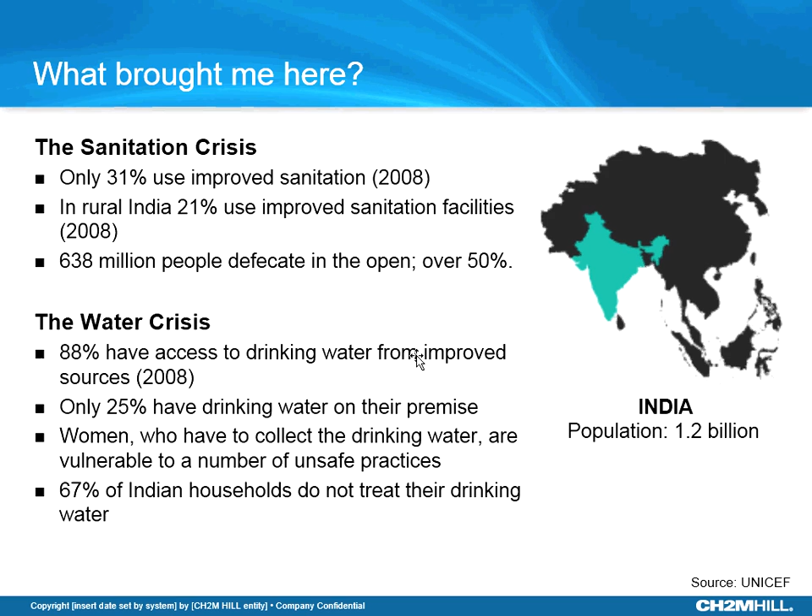And I did my graduate degree in environmental engineering, and I focused on water and wastewater treatment. During grad school, what brought me to the Bay Area is an internship at the Oceanside Wastewater Treatment Plant, which is by Lake Merced, and that was my first time being at a treatment plant. That was pretty much where reality sank in of what I was into.

I got all of my groundwork and my foundation being there for 6 months, and my professional network kind of grew around the Bay Area, and when I graduated, I got hired into CH2M Hill, and I pretty much do what I was doing before, which is wastewater treatment.

It's a little hard to understand what wastewater treatment or process engineers do without really knowing that side of the world. So I just want to get a quick show of hands of who here has ever been to a treatment plant or even knows what happens once you flush at your house. Yeah. Well, that's a good show of hands. It could be worse.

So yeah, I just wanted to give you the quickest tour that I can. I will do that just so that it puts it in context, and then I can talk a little bit about my project. So I will pick up what's the start of the pipe for me. Let's see. So that's pretty much at your businesses and in your homes. What's flushed is what's going to the treatment plant. And that we refer to as collection systems.

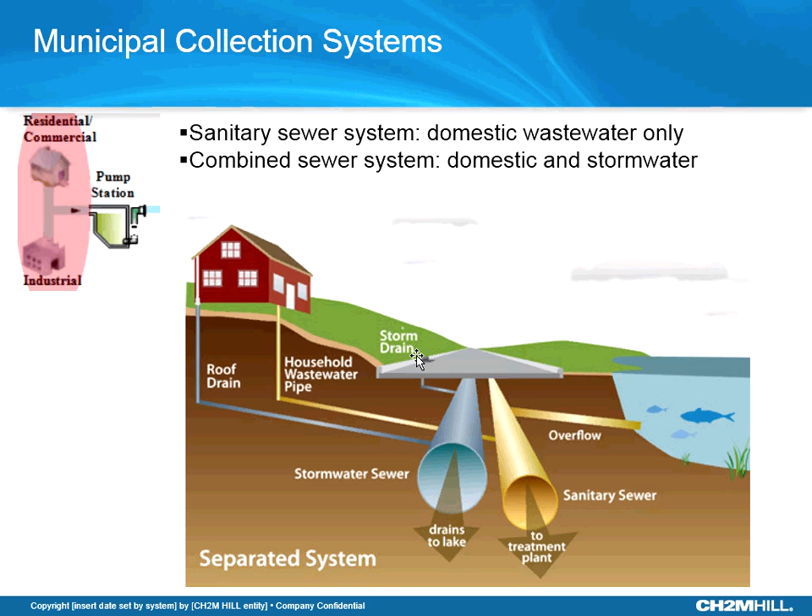So San Francisco has a west and an east system. The west side is what goes to the Oceanside Wastewater Treatment Plant by Lake Merced. So over there, if in those systems there's an overflow, it goes into the ocean. But it's not a direct overflow. It is stored. There's large underground storage cisterns that store the water, and then they go through at least a preliminary, safe level treatment before it's dumped into the ocean. And on the east side, it goes to the Southeast Treatment Plant. Almost 80% of San Francisco goes to the Southeast Treatment Plant. And so the discharge from that end is into the bay.

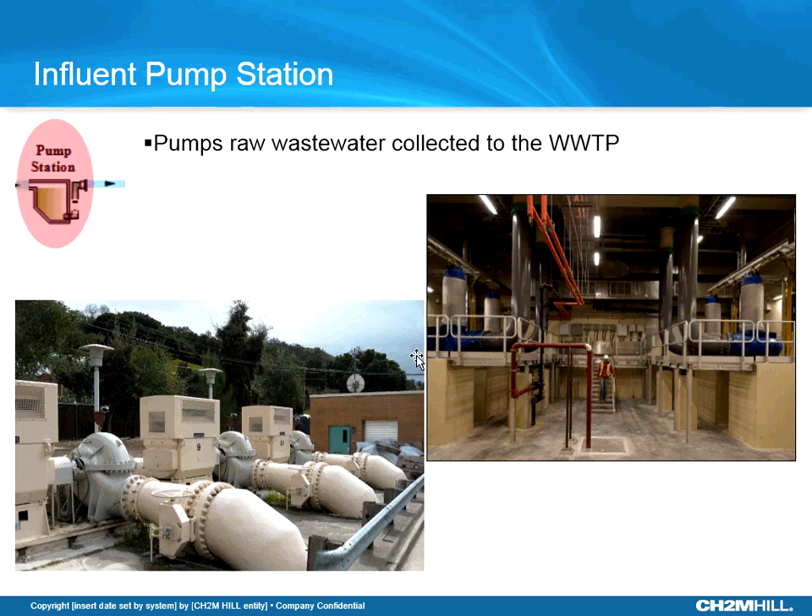And so once it's in the systems, you have these spread throughout the city. You have pump stations which pump it depending on where the system is, east side, west side. It goes into the treatment plant. And the first step is screening, which is pretty much everything that's big enough to be caught will be caught first before it goes into the more sensitive processes.

And it's funny the things that you will see here. There's been dead seals to beds, it's the strangest things that you will hear about. And those are the reasons why, when people say don't flush so-and-so things down, there's a real reason for it. Because this is where we will see it.

So that's the screening step, and after that it goes into a primary sedimentation. I'm sure you guys know what sedimentation is. It's a simple process where all of the solids settle down and the liquid goes from the top. So this is what that looks like.

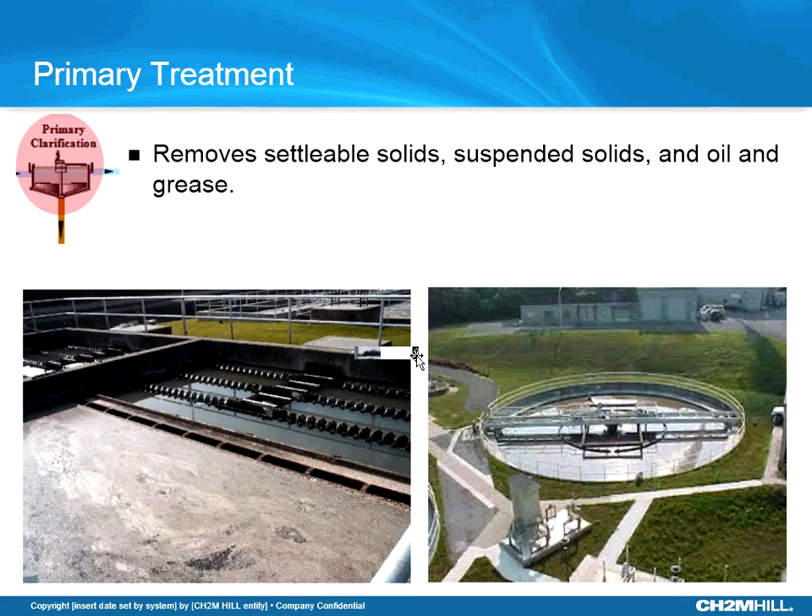And then the liquid moves through what is the heart of the process, which is a biological process. So this is where we have microorganisms, who we simply call bugs, which treat the water. It's held there for a sufficient amount of time based on design, and it pretty much cleans the water up in this process. And this is the most sensitive part of the treatment plant.

And so the other story of not flushing your pharmaceuticals, mercury and those very minute toxic chemicals down your toilet is because of this, because the bugs are the most sensitive and they're toxic to them. And once this is down, then the treatment process is down and really hard to start up again. And moving from there, it goes into a secondary clarification. There's again a separation, and then you actually have truly secondary treated water, which is safe for disposal.

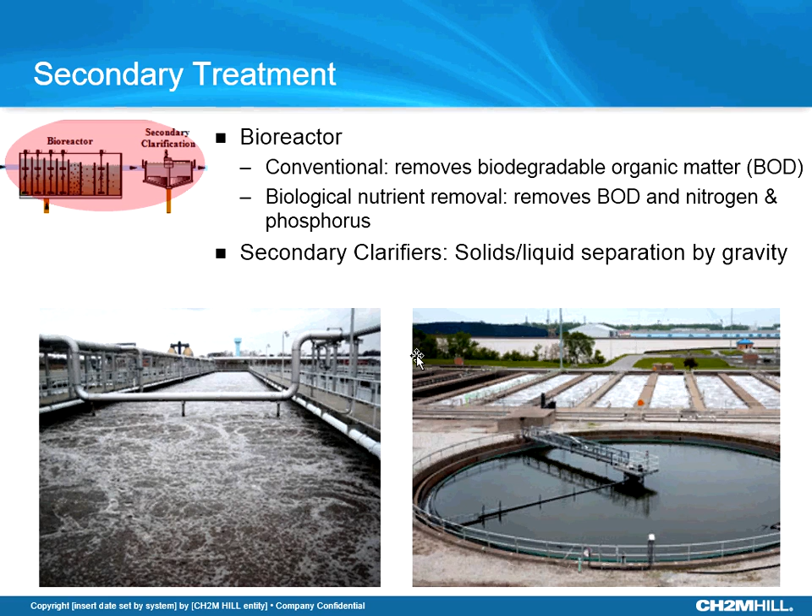Wastewater treatment has progressed a lot since the Clean Water Act kicked in. In the early 70s, people were just doing primary treatment, and then they mandated secondary treatment, which is what's referred to as safe treatment as of now. But it has progressed further because of water shortage, with recycled water being a hot topic. So wastewater treatment plants are taking that secondary effluent and putting it through advanced treatment, which is pretty much disinfection.

When you disinfect it, it becomes more valuable than just discharging it, where you can use it for reclaimed uses.

Every city manages it differently. A lot of it is public outreach. A big component of things that are beyond our control, like the boundary I talk about, is public outreach. There are voluntary programs, like a pharmaceuticals program citywide, which puts in place collection facilities or processes so it's easy for the user to dispose of their pharmaceuticals and other things. So the city puts things in place so that it's easy enough for the public, even though it's voluntary, to do their contribution to the treatment that they don't really see happen.

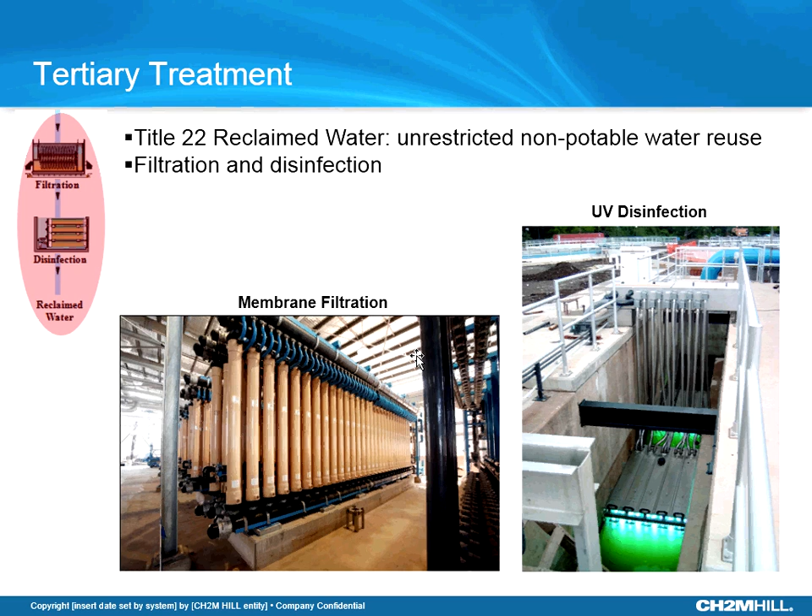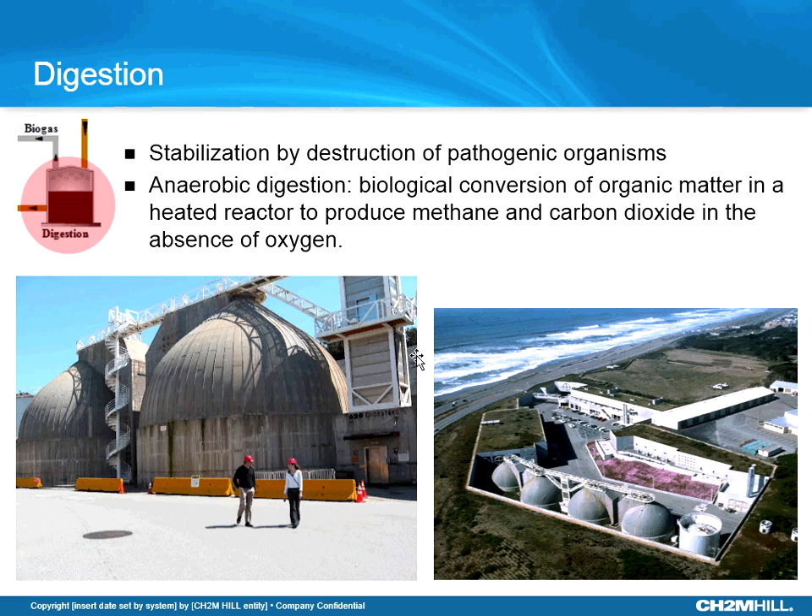The solids left from the entire treatment process, at the most basic level, get sent to a landfill once they're safe. But again, a hot topic is that even the solids can be reused, and there's a lot of potential there for energy. If you do what's called combined heat and power for digestion, you can actually recover and create heat and power from the solids.

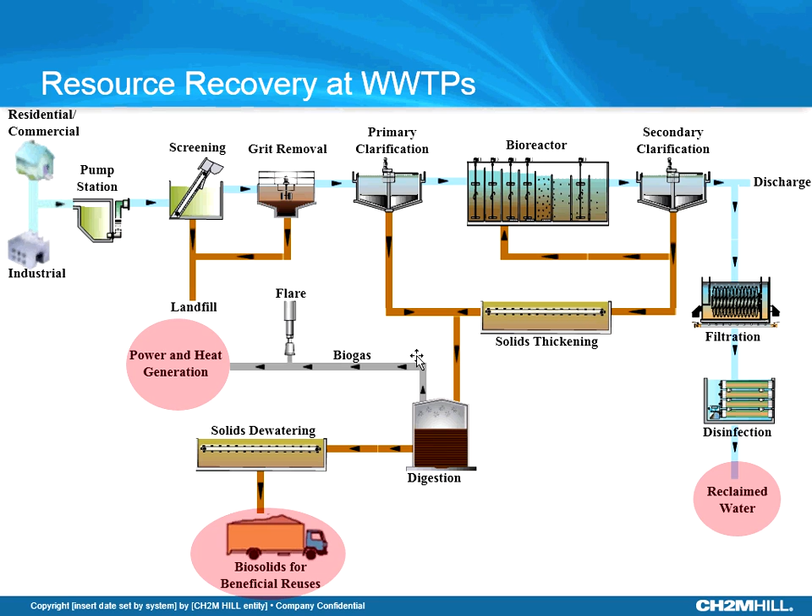These are the hot topics in wastewater right now that are trending—it's getting more advanced, where treatment plants aren't looked upon as just whatever people think about wastewater treatment, but are trending more towards becoming energy and resource centers. That's my spiel on the wastewater treatment plant, just so you'll know what goes on once you flush and it goes to the environment—that space in between.

Obviously engineering is on the top of my list. We want to promote that there are a lot of opportunities in these unconventional engineering fields too, like wastewater and water, which aren't necessarily always thought about for engineering, but there's a lot of opportunity there no matter which track you take—structural, mechanical, electrical. Even if you take any of those, you can be part of an industry like wastewater or other unconventional fields, which have these multidisciplinary engineering teams. That's what I wanted to focus on.

And then, in case you don't do engineering, which we hope you do, but still science-focused, there's a lot of other tracks and opportunities within the same industry. So specifically in water and wastewater, you can be a part of operations and maintenance. A lot of the big cities and plants have their own bio and chemistry departments. Environmental compliance, which is to do everything with the treatment plant complying to permits once it gets out. Because pretty much everything that we do is compliance driven. It is to save the waters as far as this one's concerned. So there's a lot of opportunities within just this one industry.

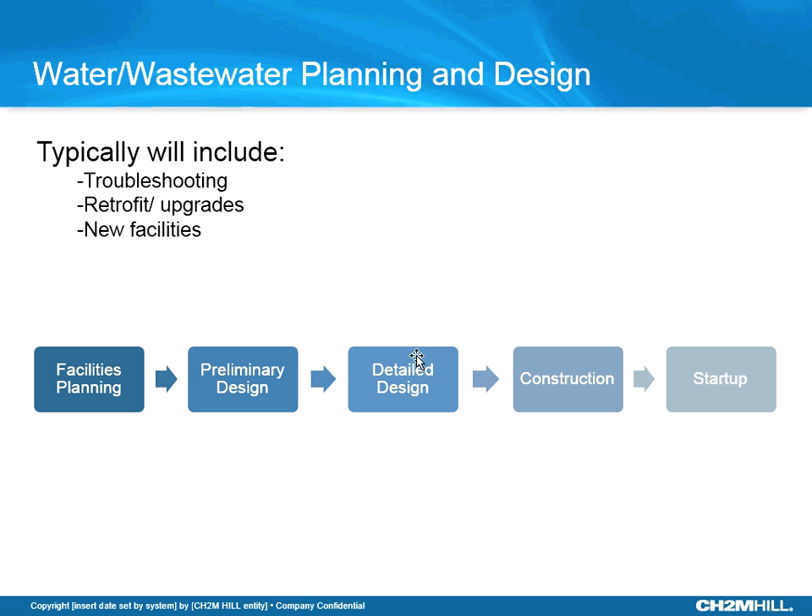And I just wanted to give you a few examples of cool Bay Area projects that I've been a part of.

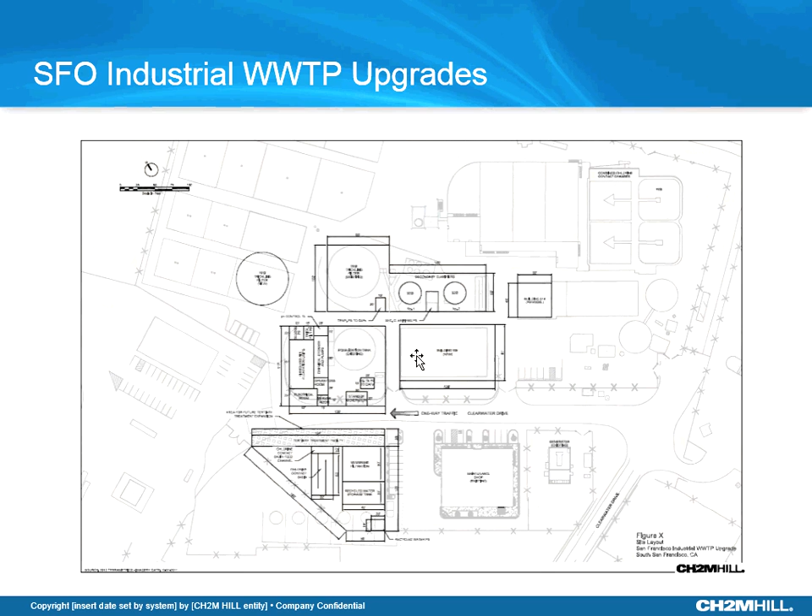Currently, my world is made up of these two. Palo Alto has a really big regional water quality control plant—Palo Alto's and all the other local regions' waste goes to that plant. They're one of only two wastewater treatment plants in the Bay Area that still incinerate, which is much older technology, so they want to upgrade to make better use of their energy and resources.

This is an example of brand new facilities, which are really good projects for a career, where you're part of it right from the beginning—picking treatment processes, putting it on the plot, everything. So that's super fun to do.

And this is our big one—Giuseppe and I are both on it, so he'll talk a little more about it too. This is the Southeast plant I was talking about in San Francisco, in the Bayview district. Their treatment plant, the solids side—everything solids related I mentioned—that plant was built in the early 50s, and that whole process hasn't been upgraded since then.

So it's definitely pushing the life of the facility, and they're planning all brand new biosolids treatment facilities. We just kicked that off last year, and we're planning—this is brand new stuff. We've just laid out the facilities, and we're looking at a whole bunch of alternatives for what's best for the plant and what's best for the city.

Once you've done that, this is a practice you do just to make sure whatever you've designed fits before you go any further. If it doesn't fit, you go back to the drawing board. So that's what we do with site layouts.

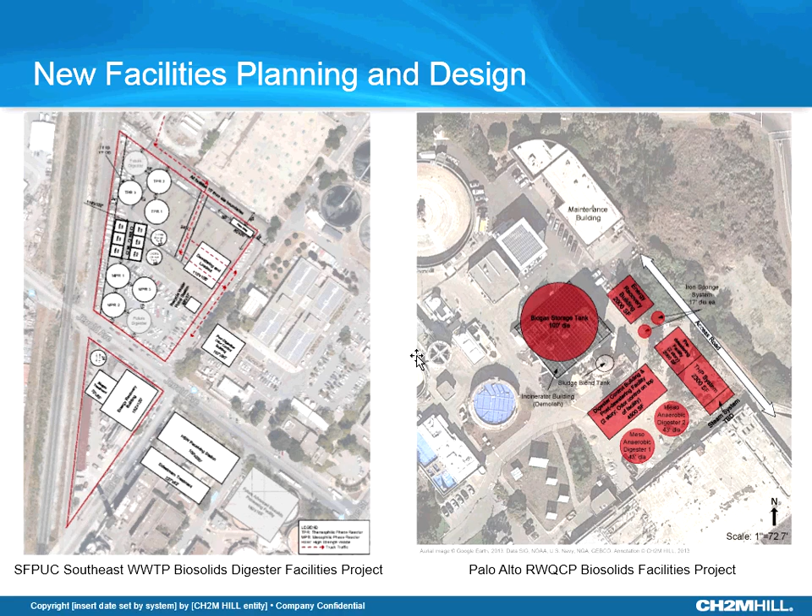So it's exciting. I always say it's great that I'm part of all these, because I love driving through the Bay Area and pointing out things that I'm a part of and building, and one day they will be built. That's the exciting part of my job. I think that's all I had.